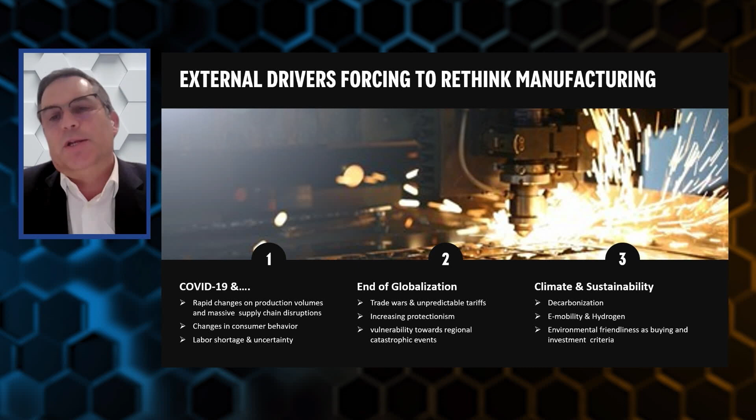And particularly in the last couple of years, we've seen that environmental friendliness is a buying criteria, and it's becoming more of a criteria for investors looking at how companies are performing and what their strategies are towards climate and sustainability. So overall, significant changes which, this goes without saying, have a quite severe impact on manufacturing strategies and what companies need to deal with.

That results clearly in some internal challenges we're hearing about in all our conversations with clients in automotive, general manufacturing, and aerospace - more and more loudly in the last couple of months.

If I start on the left side, the entire topic of complexity - we see an increasing rate of complexity coming purely from new technology and all the challenges that go along with those technology changes in the industry, including an increasing number of variations and variants of products as well as processes.

I talked earlier about e-mobility - from an automotive perspective, all of a sudden you produce the same vehicle as an ICE, as a hybrid, and as a fully battery electric vehicle. That alone has a massive impact on the number of variants you need to handle in a manufacturing environment. Last but not least on complexity, I'd call out the interdependencies between systems, components, and peripheral systems, which are increasingly making our life complex.

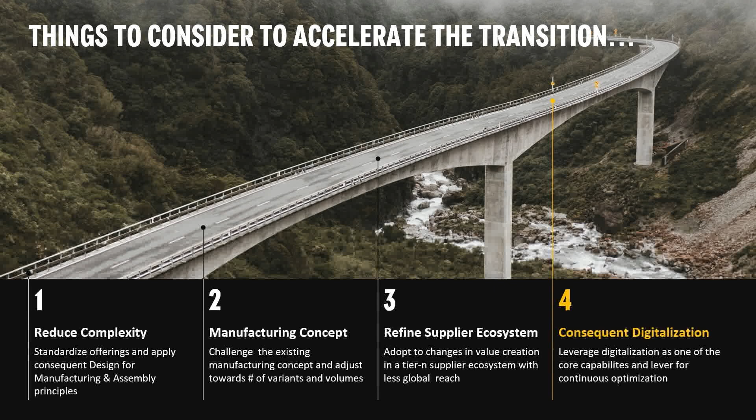Last but not least, there is the theme of consequent digitalization, which will certainly help significantly to accelerate the transformation, meaning learning to leverage those digital technologies and digital tools as one of the core capabilities which allow you to continuously optimize your environment. Again, here the shift from more conventional ways of efficiency increase and optimization activities to doing that much more in the digital space, which allows us to get to new heights, a new wealth of opportunities we haven't actually been able to leverage so far.

So I wanted to leave you with that couple of thoughts. It's certainly a very interesting environment for all of us in the manufacturing space. I think it is a challenging environment which forces us to rethink a lot of qualities of our old thought models and concepts. But on the other hand, it gives us an opportunity in adjusting our manufacturing strategy, adjusting our activities, and getting to the next plateau of productivity, being fit for the future.

With that, Stephen, I want to hand back to you.

Richard, thanks again for spending time with us. That was great for you to talk us through those thoughts. I'm really interested to know, how much of what you've shared today is new from, say, one year ago, versus what you're expecting to be talking to people about perhaps one year from now? It seems like a lot of change happening quite quickly.

Yes, definitely, Stephen. First and foremost, I think that concept of resilient manufacturing is really new to all of us, and I think we're still grasping what it really means in all its different facets and fashions. But we're clearly walking away from volume-optimized, very rigid manufacturing concepts and structures, which weren't really able to deal with all the changes from a volume and complexity perspective. So this is what we painfully had to learn, that that world seems to be a world of the past, and nobody believes that this is coming back.

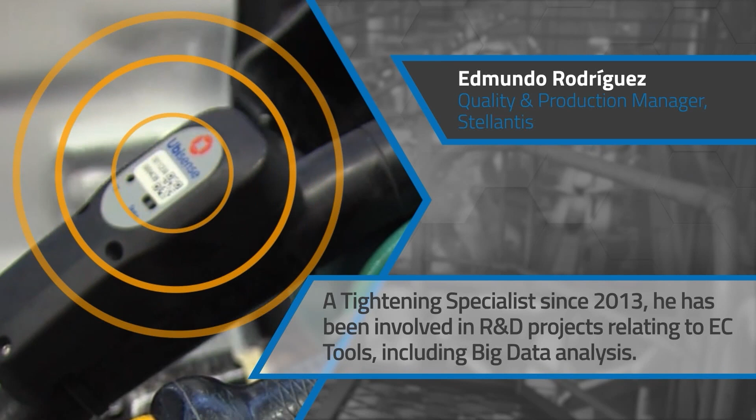With more than 60 years of activity, Vigo is a big and efficient production center with 500,000 vehicles produced a year. This means more than 2,000 cars a day, with particularly high diversity of models and brands.

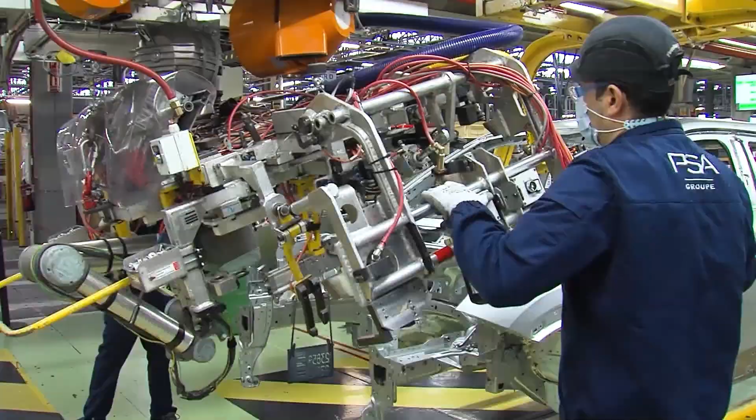Vigo has two assembly lines. The first line, produced since 2008, makes two models of the same vehicle under two brands, the 301 and the Citroen equivalent under the same model. Line 2 produces all the little vans, like Peugeot Partner, Citroen Berlingo, Opel Combo, Vauxhall, and also Toyota Pro Ace and the Citroen Space Tourer, which is a family car. That's a huge amount of brands and models.

This point gets us to have hard work in each of the two assembly lines, needing to ensure the correct operation of every tool when it's located with the correct car.

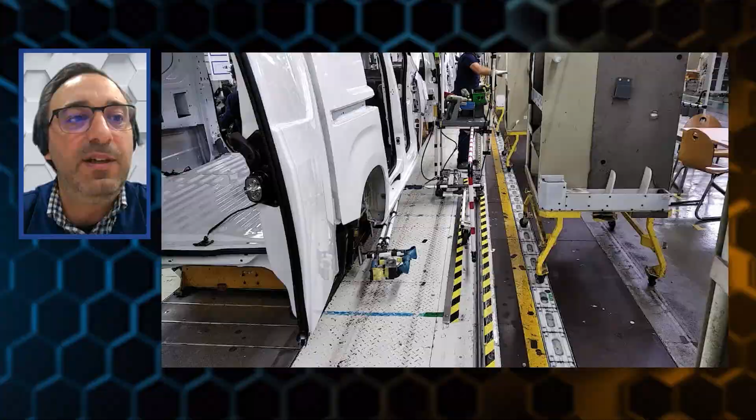In terms of tightening, with more than 500 EC tools working at a time, before the arrival of Ubisense technology we used different solutions with mechanical and digital elements to limit the operation of the tools, using a metallic plate on the floor detected by an inductive sensor, like a chain for a dog that cuts permission for the tool to work. With the photocells on the bars around the chariot, we could detect the car and get an idea of where the tool was. That was the main work for us, to know where the car is and where the tool is also.

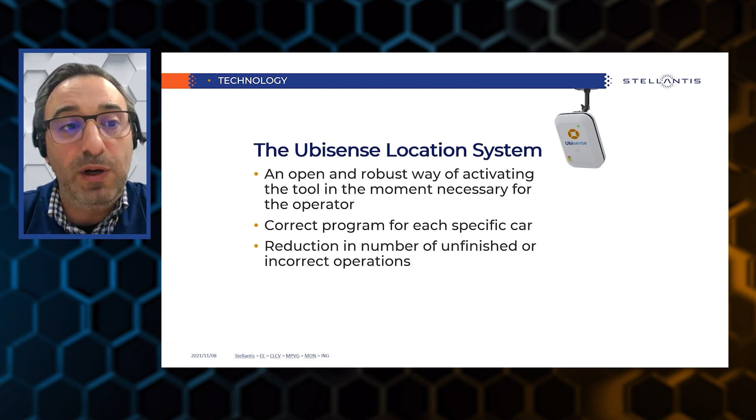But that was inefficient in terms of balancing work, maintenance, and above all quality and production. A lot of non-finished operations were detected by quality systems. With the Ubisense location system, we're able today to get our tools ready just in the moment we need to, with the correct program for the car we need to work on. This meant an important improvement in the time we spent on rework, due to the reduction in the number of non-finished operations. Now I'm going to show you a video taken on the assembly line where I show you how the system works.

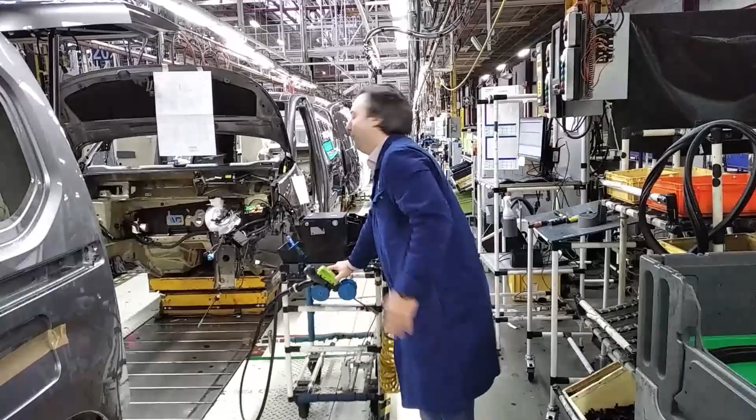That's me on the assembly line. That chariot you see is where it ports the tool. The tool is not ready to work, and there's a white light that shows if the tool is ready. Because the tool is outside the area of the car, it isn't ready. Now it must be ready - you can see the light turning on, and the tool is ready to work with the correct cycle for the correct car. Every car needs a different cycle.

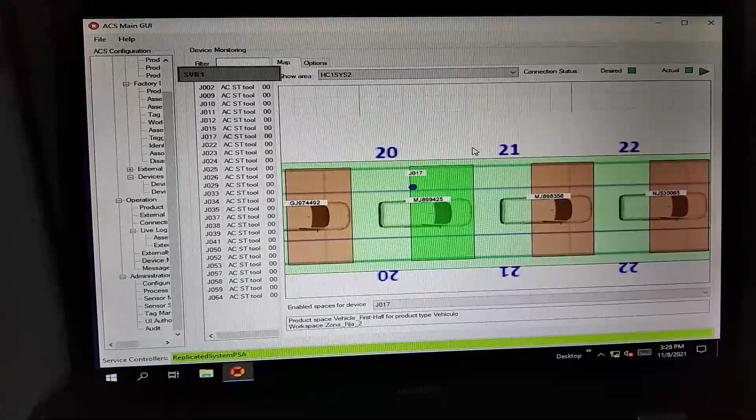If I go out of the area - it's a virtual area that goes with the car - then the tool is off and not ready to work. That's an operation of tightening a security belt. The green cage attached to the tool is the Ubisense tag, and that's what the system sees as I work with the tool and the chariot. The red point turns green when I'm inside the area, as the tool gets inside the area of the car we need to work on, and if it goes out it turns red, meaning the tool has no permission for the operation.

With Ubisense, you can work wherever you want. If you have some delay on your operation, you can stay in the company of the car, and the tool is ready all the time it's near the car.

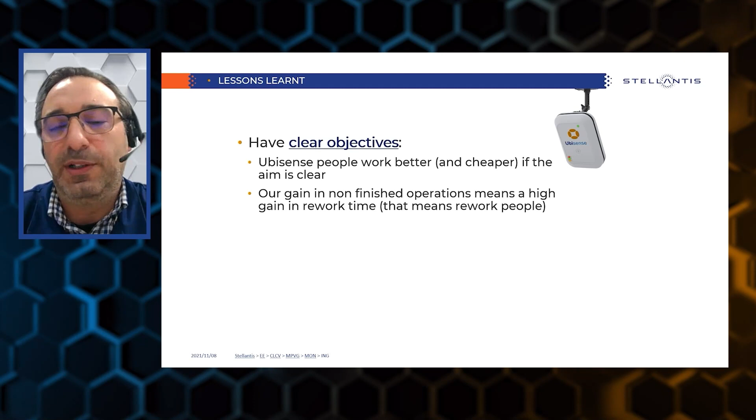About lessons learned: our first lesson is to be sure your objectives are clear when you install this product, because there are a lot of services the product can give, but not all of them are useful for every situation. We were clear on our goal to improve the non-finished operations number, meaning a big improvement in time needed for the product rework.

The second lesson is to be sure that the rest of your systems are profitable, because you can earn some budget taking advantage of every system that already exists. In our case, the information from the encoders we already had gave us the position of the cars, and we saved the cost of installing Ubisense tags in every vehicle.

For our future plans, if everything goes as expected, we're going to extend this type of system to the rest of the areas of the assembly lines, because everybody's very satisfied. The speed of the operations and the operators working in this assembly line is very high. It's a high gain of time for the company, for Stellantis.

Well, that's the end of my presentation, and I'm very pleased to be here. Thank you all.

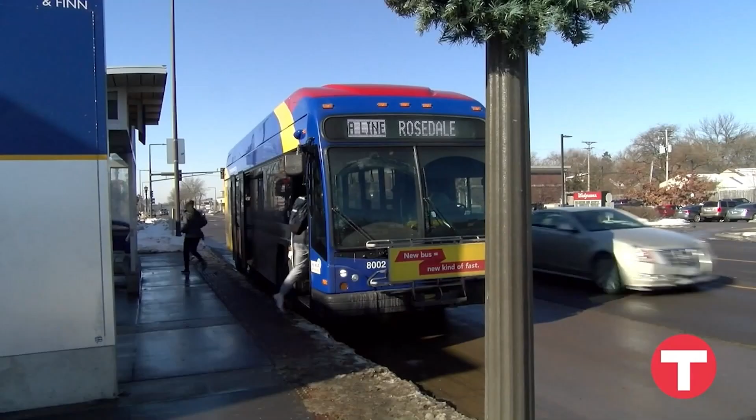Thank you, Steve. I'm Rick Paulson. I work for Metro Transit. I'm a business system analyst here in St. Paul, Minneapolis, Minnesota. And we have a short video to show what Metro Transit's all about.

In 2016, Metro Transit introduced a new type of bus service called Bus Rapid Transit with the opening of the Metro A line on Snelling Avenue. Bus Rapid Transit, also called BRT, is a package of transit enhancements that adds up to a faster trip, more frequent buses, and customer amenities at the stations.

First, let's look at how the service is faster than standard local service. Stations are spaced farther apart so buses make fewer stops, which helps buses stay moving more of the time. Ticket machines at stations and mobile apps allow customers to purchase tickets before boarding. Our buses communicate with traffic lights to allow them to move through intersections faster.

Next, let's look at the amenities that make taking transit more comfortable and convenient: security cameras, emergency phones, enhanced lighting, push-button heating, ticket machines that take cash or a credit card, and signs showing when the next bus will arrive. Learn more at metrotransit.org/BRT.

Excellent. We have a presentation here to show our story with Ubisense. Here's an overview to show the scale of Metro Transit. We have about 81.9 million rides a year, 909 active buses that cover that. That covers about 907 square miles in our 7-county metro area, and we have about 130 routes that cover that.

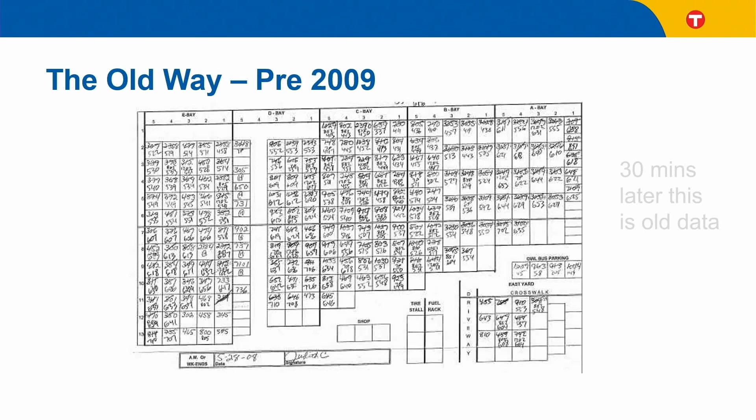Pre-2009, this was our system for marking up and assigning buses. Personnel would walk the garages with this map and fill in bus numbers, probably about 3 times a day: AM, PM, and then evening after pull-in. You can see edits within the map, so they would have to go back and redo it because buses would move. For pullouts, we would have to assign the first row and work our way back, and if anything changed, this would screw up our pullout and things would get clogged up and buses would leave late. This is just a snapshot of the day, so half an hour after, we have old data. There had to be a more efficient method.

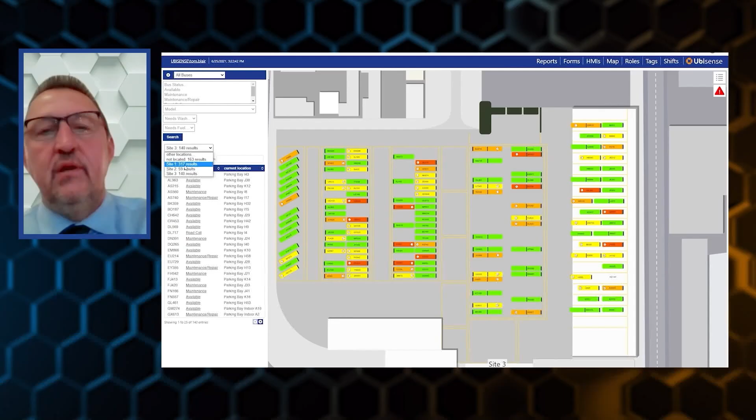So in 2009, Metro Transit issued an RFP. Three companies submitted bids; Ubisense was one of them. This was before my time, because I was a user of the Ubisense system when I was with Trapeze - I would show up in maintenance and go, hey, I need to find a bus, and they would show me this map of where the buses were. I was like, hey cool, you guys have a map. Ubisense was chosen because they could guarantee a more accurate positioning in the garage to keep the buses in the lane in each of the bays. So Ubisense installed their system.

We started with our 5 garages that house our buses. We used battery RFID tags on all the buses and installed sensors in all 5 garages. Then we used GPS location from our CAD AVL system, importing logs from that system into Ubisense to show buses that were parked outside the garage.

The first generation was not an exact replication of the garage - it was a little crude in its representation, but it did show the buses in the lane. It had colored icons showing different statuses: blue was a foreign bus, white was assigned, green was available, and this is what dispatchers used to assign. That was our map through about 2015, and then Transit Yard Manager came about, with a more true representation of the garage. But the downfall was it was a slow loading map and users would complain about that. Still, it gave us more business rules and a cleaner map for the dispatchers to use in maintenance.

Around this time, we added some enhancements and additions to the system. We developed hardwired tags. Our battery tags usually have issues in the winter because winters are a little harsh up here. So the first cold snap in December, we'd probably have 20 tags in each bus garage go dead, and then we'd take time to change those out and track those buses down.

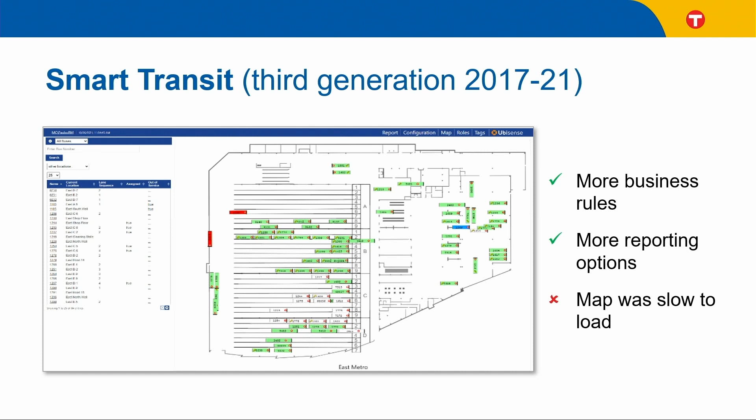With COVID, our service was reduced and a lot of buses were stored, so anyone looking at the map knew that all the buses up there were out of service and not to use. And our present system is SmartSpace.

This one again has more business rules. It's much faster, it's more robust. The look and feel is the same as Smart Transit, so it's not a whole lot of training for users when they move to it.

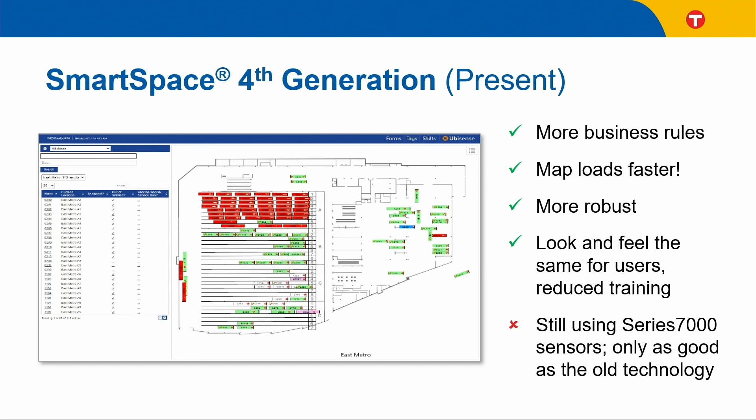And our tags on the buses are usually right up front here. Hardly any issues with them now, with them being hardwired.

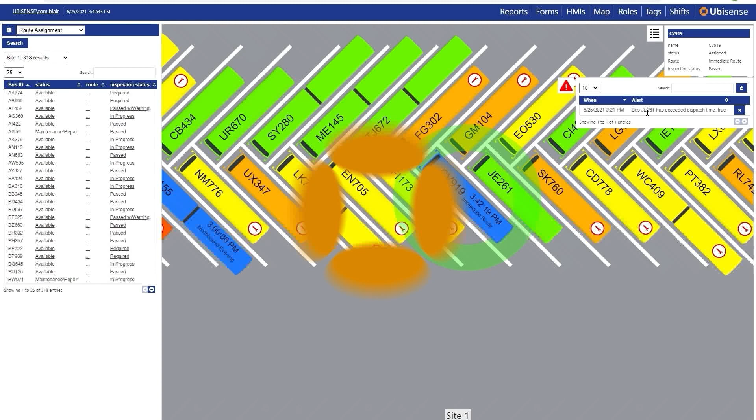New projects we currently have going on: we are currently adding the new sensors to all 7 facilities, and we've started with one garage. We implemented a new Giro HASTUS interface that allows more data to be queried from HASTUS and allows us to show more data on the map, as far as bus status, besides just assigned and unassigned. And we're adding sensors to two more gates on our freeway transit stations.

That's our story. Thank you, and I'd be happy to take any questions.

Rick, thanks, that was great. It's really interesting to see the evolution of what you've been working on, from a very paper-based process through the early versions of hardware and software to where you are now with the latest versions of the technology.

You mentioned you were previously a user of the system. How important do you think that is, to get that user perspective for these types of systems? And has that changed the way you've approached any of these projects?

I think it helped me. I kind of saw the good and the bad when I was a user, heard the complaints, what users would say. But when I took over in 2013, I kind of had an idea of what had to be done. Our battery tags were probably the root cause, and we worked hard to develop a hardwired tag, and we kind of eliminated that issue.

Thinking about the future, we heard from Edmundo at Stellantis about how they're building this real mix of products down there at Vigo, and especially now including electric vehicles. I'm interested to know whether Metro Transit have any plans to electrify the fleet, and if so, what kind of challenges that might pose for you and the team.

Hello everybody, my name is Wolfgang Fuchs. I am working for Mercedes-Benz in the IT operations department, and there I am part of the Center of Competence for all real-time locating systems in the different production and shop floor areas. Today I have the pleasure to give you an overview of where Mercedes-Benz is working together with Ubisense and using their technology, the ultra-wideband technology, for different use cases.

I will start my presentation first with a short insight into our Factory 56, which is quite famous in the meantime. Later on, I will give you an overview of how we are using the ultra-wideband technology at Mercedes-Benz, and which use cases we are preparing and realizing at the moment. I will give you some information about the challenges and lessons we have gained and experienced in the meantime. I think it's approximately up to 10 years which we have experienced with Ubisense at Mercedes-Benz now.

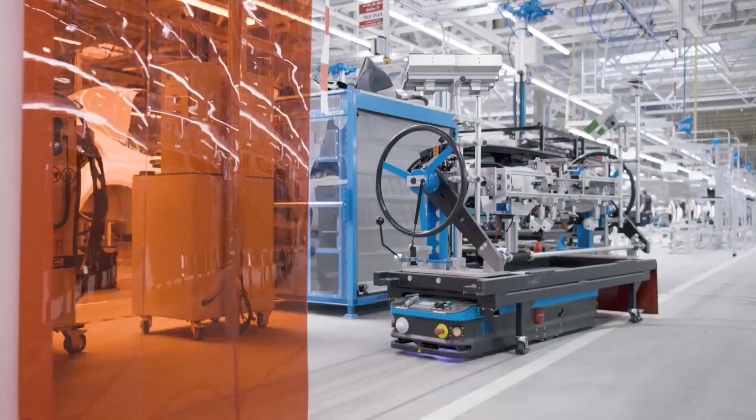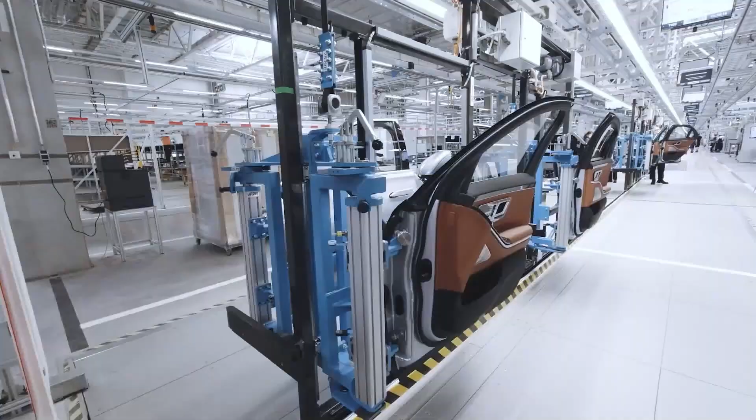Automobile production of the future - what should it look like? It is sustainable, digital, flexible, efficient, and above all it has people as its focus. All this is already reality in Factory 56 at Sindelfingen, Mercedes-Benz's most modern assembly hall in its global production network. Here a diverse range of vehicles is produced fully flexible on the same line, adjusted to market demand - first the S-Class sedan and long wheelbase version, then also the Mercedes-Maybach S-Class and the all-electric EQS. At the same time, efficiency is increasing compared to the previous S-Class assembly by 25%. This has been made possible, among other things, by wide-scale digitalization and by the flexible structure of the production process with tech lines and driverless transport systems. The two tech lines bring together all the complex plant technologies. They serve to avoid fixed points in the assembly process. Flexibility improves - when new models are added, conversion work is easy to carry out in the other areas of the assembly hall.

Now you've had an insight into the new Factory 56, in which we produce most of our most important cars, like the new S-Class, the Maybach, and also the brand new EQS. Factory 56 is interesting for us at this presentation because we use ultra-wideband in every production line, all over the complete shop floor in Factory 56.

But Factory 56 is just one of many halls and facilities where we are working together with Ubisense, using the ultra-wideband locationing system of Ubisense and SmartSpace. For example, alone in Sindelfingen we have at the moment 3 facilities, 3 halls where we use the system. We have Rastatt and Bremen, which are 2 very important other facilities in Germany where we're using Ubisense. We are also working with Ubisense in Charleston, United States at the Vans, and at AMG in Affalterbach, where we produce our high performance engines.

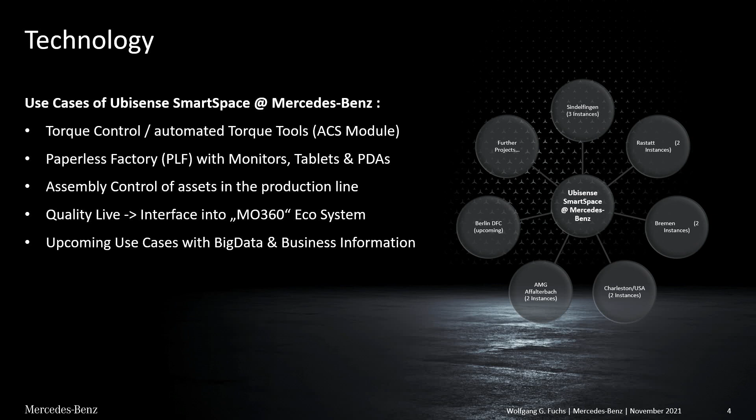Another use case is the assembly control of assets in the production line. That means we are doing two things with this: with the ultra-wideband location, with the real-time locating system, we are giving triggers at the assembly line. For example, when the new car enters into a new station, through the ultra-wideband location, we're giving the system, the device, the automated machine, or the robot the trigger that now we have a new car, and at the same time we're giving the unique identifier.

For example, in Factory 56, it's an 8-digit long number, where each car is individually uniquely identified, and we're giving the number and the trigger, so the machine knows there is a new car inside, and he has the unique identifier and therefore the information, and then he can get the other information he needs from any ERP systems he's connected to and can fulfill and do his job. We have many different assets and devices there, like refilling, refueling, measuring devices, and so on, a lot of them.

Ubisense SmartSpace real-time locating information is part of the Quality Live application, which is part of our MO360 ecosystem platform, which I will give you an insight into in some minutes, and therefore also a very important system where real-time locating system information is going into the facility, into the production, to give the workers information about real-time location of different cars, bodies, and so on, where the workers have different jobs to do.

And we have, I'd say, many upcoming use cases and ideas where we could use the system. I just said the large words like big data, artificial intelligence, business information, getting more digitalized. These are the different technologies and use cases we use at Mercedes-Benz at the moment.

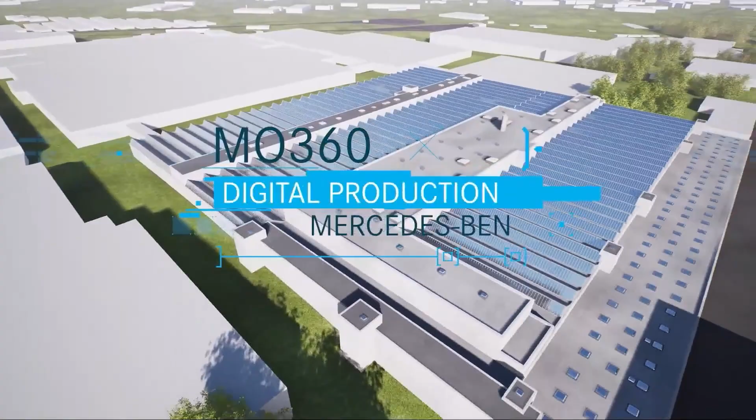Digitalization opens up entirely new possibilities for the future of vehicle production at Mercedes-Benz. It is the fully digitized and paperless production that connects all production data for the first time, making it available across the entire production process in real time, while simultaneously ensuring the highest product quality. All this is enabled by MO360, the new digital ecosystem for vehicle production.

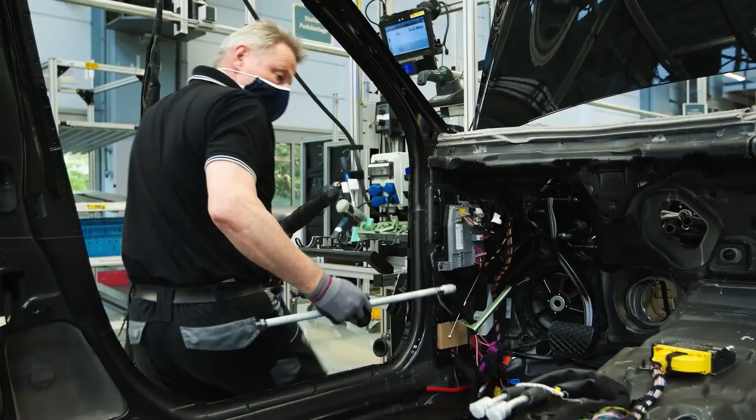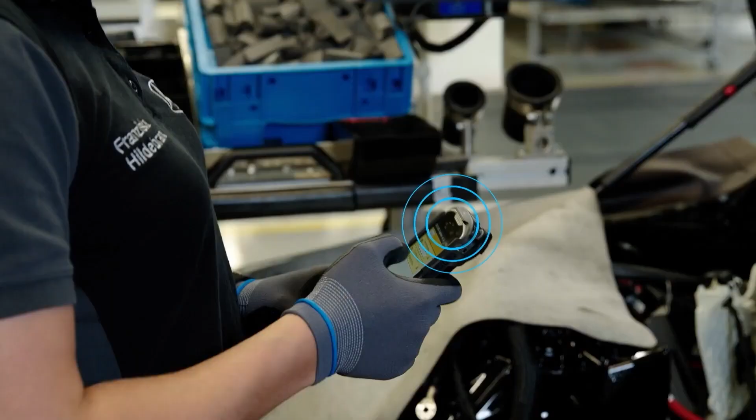In our ultra-modern production, vehicles are located within the production line with absolute precision. This is the basis for the needs-based information management of the paperless factory, so each worker receives exactly the information he needs for his next work step directly at his workplace. Internet of Things tools are integrated into the factory's local network, performing checks on whether all work steps have been fully and correctly completed. Workers confirm their activities digitally as well, ensuring greater efficiency and higher quality.

The quality management system is fully integrated in MO360. This means that every quality manager has full access to the current live status of every single vehicle in production at any time.

MO360 detects deviations and informs only the responsible employees and quality managers. With the previously collected production data, the cause of a deviation is identified straight away and corrected instantly.

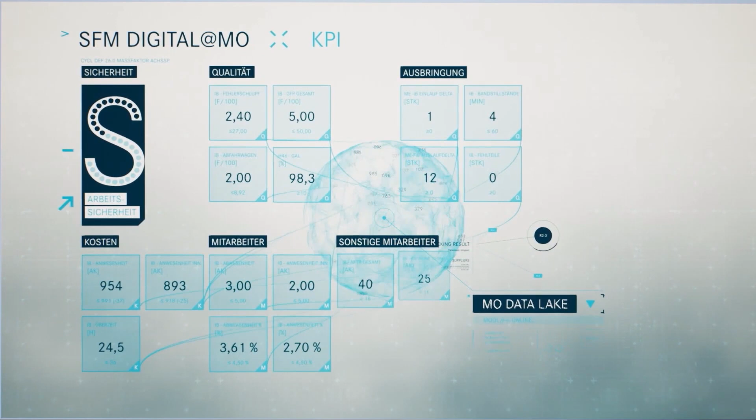All applications of the digital ecosystem MO360 are fully integrated and interact seamlessly. The core of the system is the digital shop floor management application, in which all production data is merged, allowing access to a comprehensive live status of the production at any time.

In everyday use, the digital shop floor management is completely convincing, both in the optimization of quality processes and as a communication tool. MO360, the new digital ecosystem for the vehicle production by Mercedes-Benz.

Digitalization, that's the slogan for the future. So what are our plans for the future in regard to Ubisense at Mercedes-Benz? First of all, as I told before, the cloud solution, the cloud installation will be the thing we will try out very soon, because we're very interested and keen in getting more involved with cloud solutions and get rid of our own unique data centers which we have at each facility. So we want to have the efficiencies and the positive aspects of the cloud possibilities, and that is one major aspect we will follow in the future, and we will be starting with it very soon.

We will go on with the next two steps with provision of new and additional APIs, because that brings you forward. With time and with many experiences, you gain more information and more ideas how you could use the information and the real-time data. So it is important for us because it brings you forward to do a provision of new and additional APIs to get more and more systems connected with your real-time locating data.

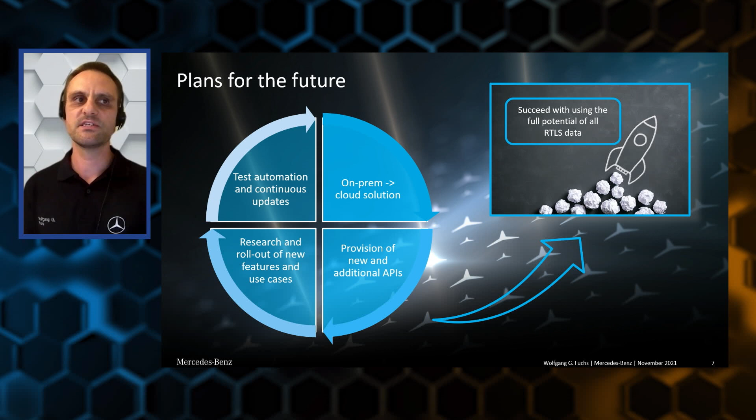And we think if we get all that information, those ideas, those use cases together, we will really succeed in using the full potential of our real-time locating system data with Ubisense. And yeah, that was my presentation. Thank you for your attention, and perhaps I can answer some of your questions.

Wolfgang, thanks very much for that. It's great that you've packed more than 10 years of experience into the lessons you've learned and your plans for the future. So thanks for sharing that.

One of the things I was particularly interested in, you mentioned right at the start around your role and what you're doing at Mercedes, is this idea of a centre of excellence, a centralised team responsible for these location-based technologies. How did that come about, and is that something you would suggest other organisations should look at and benefit from?

Yeah. First of all, of course it is hard to fit 10 years of experience into a 10-minute video like this, but I try to. And to your question, yes, I am part of the Center of Competence, Center of Excellence. It's quite the same, you can call it what you want. Some call it Center of Excellence, some Center of Competence. I think the more diverse your company is, the larger your company is, the more important such an institution becomes.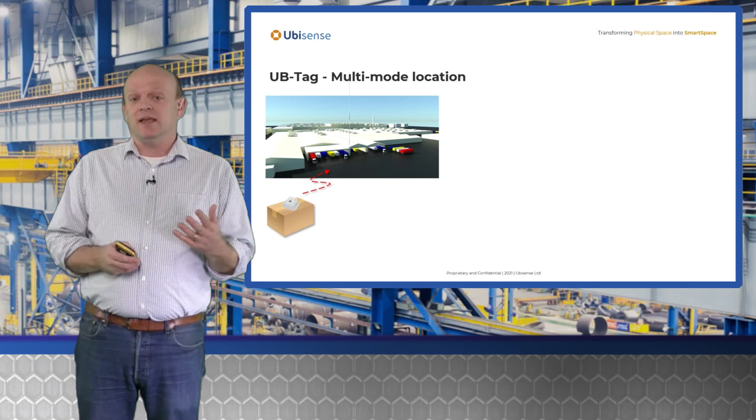Now, you might think that if it does all of these things, and it can actually do all of them simultaneously, that means it's a more flexible tag, and you'd be right. So we can take a package that comes into a factory, attach one of these tags to it, and take that into, say, a loading bay. There, we may only want to know roughly where that item is, so we can use Bluetooth Low Energy beacon sensing using a plug-in sensor like that.

They're very, very cheap, to find out where that particular parcel is to within perhaps 5 or 10 meters accuracy. And then as that package moves through the facility, maybe it moves into a warehouse where we need slightly better accuracy, perhaps a meter or 2, and there we can use exactly the same tag, transmitting Quuppa signals, using the Quuppa location system to find out which particular area of the warehouse it's in.

We can also use the same tag whilst the package is moved to line side, where there's lots of metal, a very challenging environment, and we need to know exactly where that particular item is, with the Ubisense system using our ultra-wideband technology to find very precisely where that tag is. So the same tag can be used all the way through the life cycle of a package, moving around the facility using different location modalities to get the right balance of performance and cost.

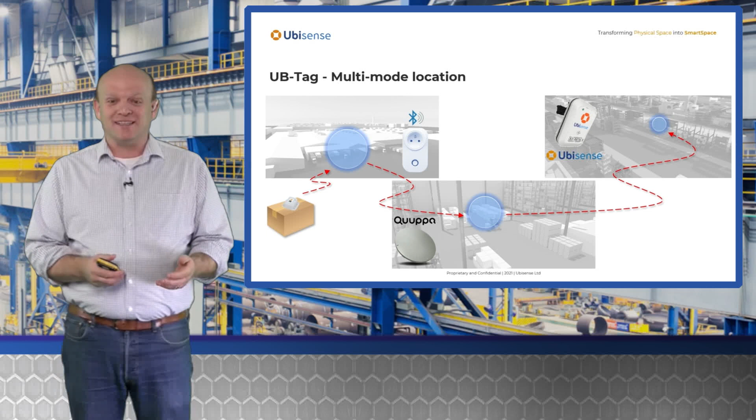We're doing all of these things simultaneously, and you might think that means the battery lifetime of the tag would be compromised. Not at all. The UB tag is actually our longest lifetime tag for a particular size of battery, more than 6 times the battery lifetime of competing UWB tags using similar batteries. If we look at the battery lifetime of a tag transmitting ultra-wideband once a second continuously, with no cheating using accelerometers to detect motion, then a UB tag will last for over 10 years in that mode.

A competitive ultra-wideband tag might only last 1.6 years, so there's a big difference in battery lifetime. If we look at the UB tag in BLE mode, it's over 13 years. And actually, we can do both of those things together, ultra-wideband and BLE, and still get nearly 8 years of battery lifetime out of a tag. So it's a very, very long-lived tag device.

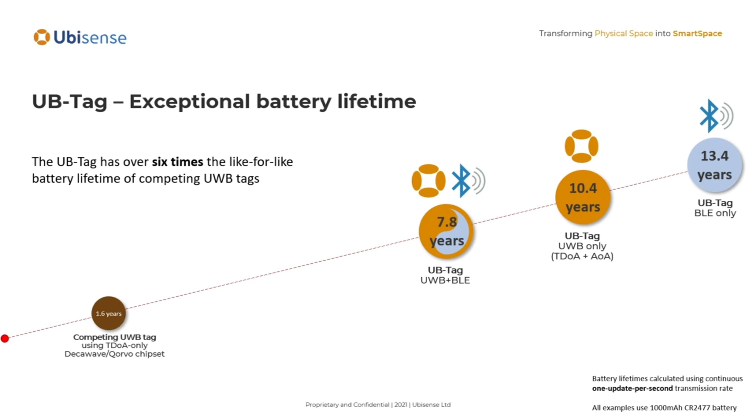Now, because we're expecting these tags to be out in the environment for many, many years, we have to build them tough, and we've built the UB tag for industry. It's very compact - the main body of the tag is about the size of the top of your thumb. It can attach to anything and it's not obtrusive. It's tough, a sealed unit, tested to IP69K. Nothing can get in.

It will last for a very long time. We've driven cars over it. It has multiple BLE antennas, so it allows those technologies using BLE to work more effectively in tough industrial environments. And it has a magnetic button that allows us to interact with the tag by holding a magnet close to it, without having to put any kind of break in the case, which might let in water or similar problems. It can be attached to items in lots of different ways - we can use tie wraps, screws, or glue it to things. It even comes in different form factors where we don't have the mounting lugs, just the main body, and as a watch type form factor that allows it to be used for tracking personnel.

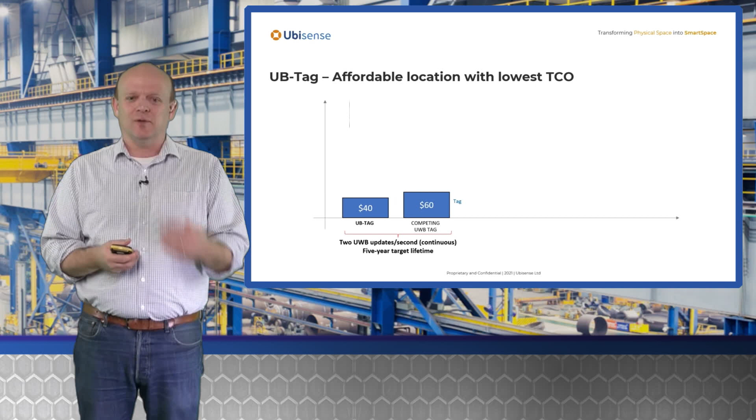It's also the lowest total cost of ownership tag that we can see out there. If we look at an ultra-wideband application where we're using a tag for about 5 years, tracking it twice a second continuously, which might be the kind of performance we're looking for in a factory, the UB tag is cheaper than competitive ultra-wideband tags right from the get-go. But because we've got such a long battery lifetime, we also win in terms of total cost of ownership. For that 5-year battery lifetime, the UB tag has enough battery life to get us through to the end with the battery it had on day one. But that competitive tag needs its battery replacing roughly every year, so every year we have to pay for a new battery, plus the cost of going to find that tag, bringing it back, changing the battery and putting it out there again. We've talked to our customers, and that cost can be anywhere from $10 to $80 each time a battery change or recharge cycle is taken into account. Here I've assumed it's at the low end of that scale. But by the time we've done that 5 times, the total cost of ownership of that tag over the 5-year period is more than 3 times the total cost of ownership of the UB tag.

We can do a similar calculation in the BLE space. Although the UB tag is more expensive than competing BLE tags - which are extremely cheap, made in very high volumes, but have very small batteries - the UB tag probably lasts about 3 times as long as one of those other tags. Again, by the time you've considered taking that tag, bringing it back, and changing it for another one - these BLE tags tend to have sealed batteries - by the time you've done that a few times, the total cost of ownership of the UB tag is about half that of the competitive BLE technology. So not only is it our most capable tag, it's also the lowest cost of ownership tag.

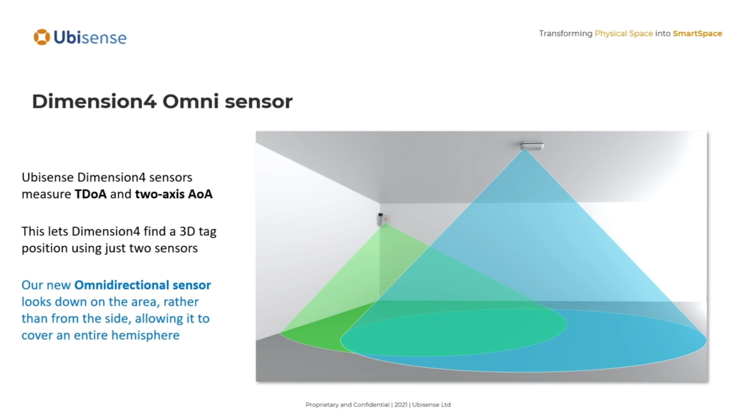So I'm going to hand over now to my colleague John Heathcote, who's going to show you some of these new technologies in action.

Thanks for that introduction, Andy. So let's now take a look at how we can put some of those technologies into action and solve some real customer problems with Ubisense's SmartSpace platform.

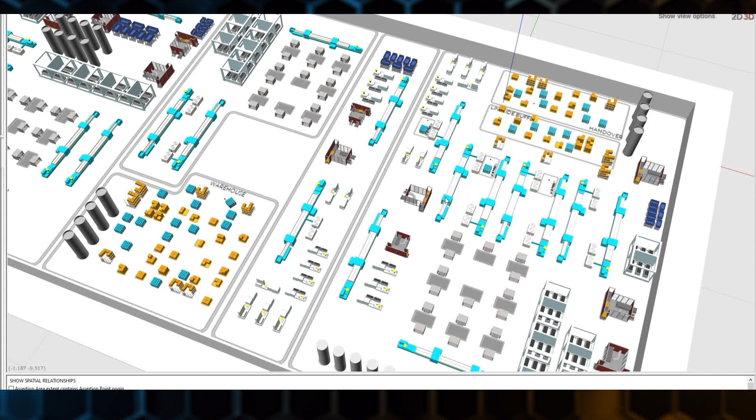This is a really common problem, and many customers we engage with are looking to move away from traditional manual bookings into their ERP system using things like barcode scanners, because being manual, those processes can be both error-prone and time-consuming.

So what we have in SmartSpace is this ability to geometrically model the production environment and also build a spatial model that represents all the interesting areas, in this case, of the material flow process. As material flows from the warehouse to various downstream storage locations, and eventually to what we see over here, these line-side consumption points, we have smaller and smaller footprints for material to be located in, and therefore more stringent requirements to register material arrival in each of those locations. This implies an increasing level of location accuracy requirement for materials arriving at each of these locations.

This is therefore a great example of what can be achieved with a multimodal tracking system using the UB tag that Andy's introduced and Ubisense Omni sensors.

In this area here, where we've got fairly small zone requirements, we can achieve wide area coverage across these line feed locations and nearby storage buffers with Ubisense Omni sensors. They allow us to track this material with pinpoint accuracy to guarantee the correct association between those materials and the various control points in the material flow process.

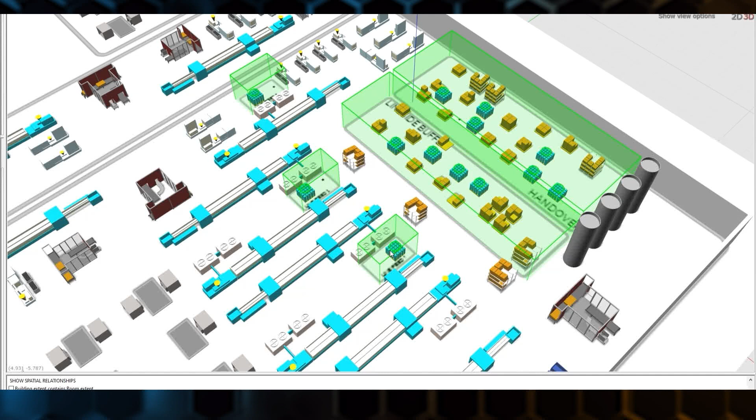You can actually see an example right here. If I get this pallet over here to move into one of these line feed locations, you can see that this pallet is now being tracked to around 15 centimeters accuracy, and we get a highly reliable spatial trigger as that material arrives into this tightly defined line feed location.

If we now zoom out and shift over to the warehouse as another example, what we can see here is pallets stored in a fairly large area, and the spatial zone that represents the warehouse is much bigger.

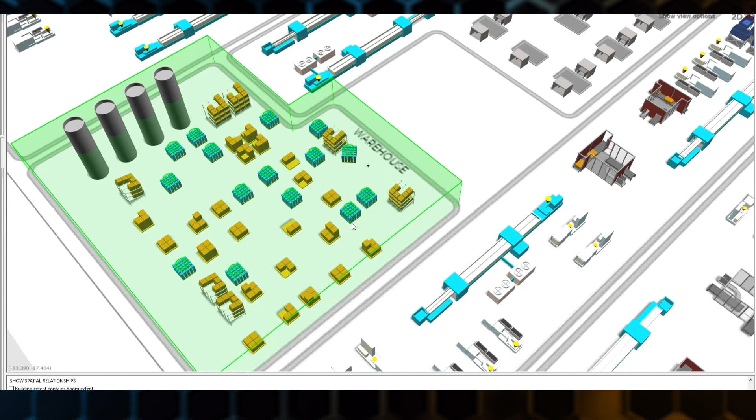By way of comparison, we can see that the required location accuracy to confirm materials inside the warehouse is much lower. In fact, what we can see here is a pallet that's being tracked also with the UbiTag, but in this case we're using a lower cost, angle-of-arrival based Bluetooth low energy real-time location system with a typical accuracy of about 1.5 meters. That would be perfectly acceptable for confirming and asserting that materials are located in this warehouse, and also for finding those materials if needed using a map.

So in doing so, we're able to use the best of multimodal sensing capabilities to achieve reliable location data everywhere in the material flow process.

So let's now switch over to see how that material flow information can manifest itself inside SmartSpace and be consumed by business users on the shop floor.

Here you can see a simple overview dashboard built using SmartSpace of all our material status information. We can see exactly where we have material shortages. In this case, we can see our line feed locations are all lacking material availability.

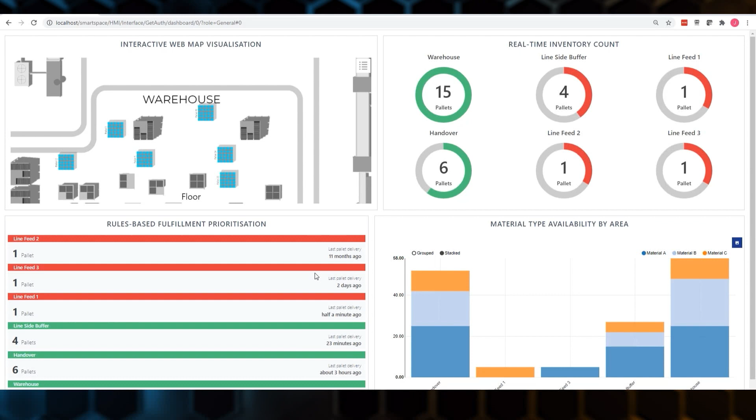We can also, using SmartSpace's process logic capabilities, build prioritization capabilities that tell the fulfillment team where materials are required most urgently. We can see in real time where all of our pallets and materials are located, and we can see those movements happening in real time on the map.

Let's say I wanted to request that one of these pallets moves down to line feed number 2. I can immediately move that pallet to line feed 2. We'll see in real time as that pallet arrives, our line feed 2 material increments and the amount of material at various locations changes as well. And the priorities for our fulfillment have changed because line feed 2 is no longer lacking materials.

Now we can head back to Andy to get some more exciting product updates.

Now I'd like to talk a little bit about how we go about deploying our systems. The stages in which we deploy are typically split into 4 components.

First of all, we'll go and survey a particular site that a customer has invited us to take a look at. That's really about understanding the site environment and the application that the customer wants us to implement.

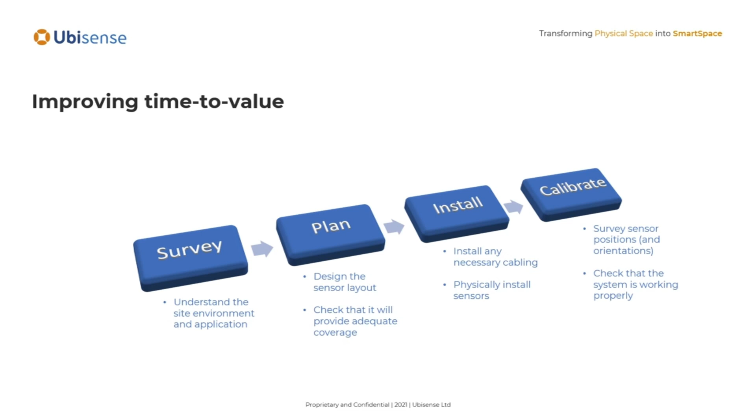If we look at the environment capture area, the survey, the way this used to be done is that people would come to us with a floor plan for a facility, and we'd try to work out from that where we might place sensors, where in those areas the sensors could see, and so on. The problem was that no floor plan in existence for any building is exactly right, and it doesn't really tell you much about how the building's being used.

So we get rid of that, and nowadays we use laser scanner technology. This is one of our employees carrying a laser scanner in his hand. It's got a backpack-mounted data capture utility, and that generates a point cloud, a bit like this one, which shows a kind of indoor 3D picture of exactly where everything is in a factory so that we can understand how the factory is set up.

Now, the point cloud by itself isn't tremendously useful, but we have tools that turn that point cloud into a 3D model with walls and equipment and so on. We can use that model in lots of ways to improve the subsequent stages of our installation.

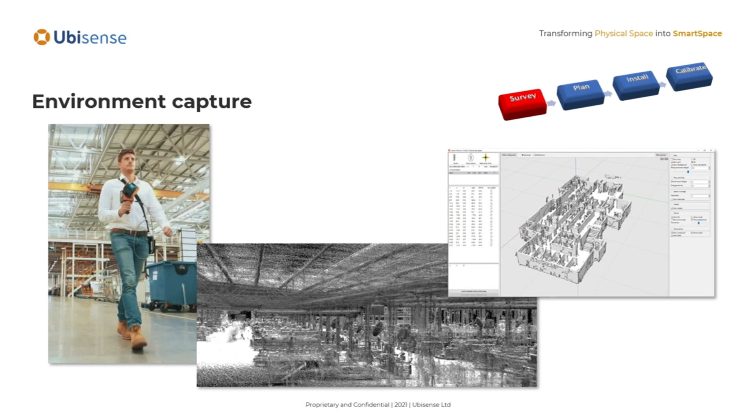We can take that model, for example, and in the next stage, planning the sensor system, work out where the optimal place is and the optimal number of sensors are going to be. We can take the model and place virtual sensors inside it and see exactly how they're going to be obstructed by items in the factory, walls, equipment, and so on, and add and remove sensors until we've got exactly the right balance of performance and cost for the particular customer.

Once we've got an optimal sensor plan, we can work out whether the performance of the sensor system is really going to match the application requirements. We can send virtual tags into the space and use exactly the same algorithms that we'll use in the final sensor system to analyze virtual signals sent from those virtual tags to our virtual sensors, and check to see what the performance of the system is at any point in that space.

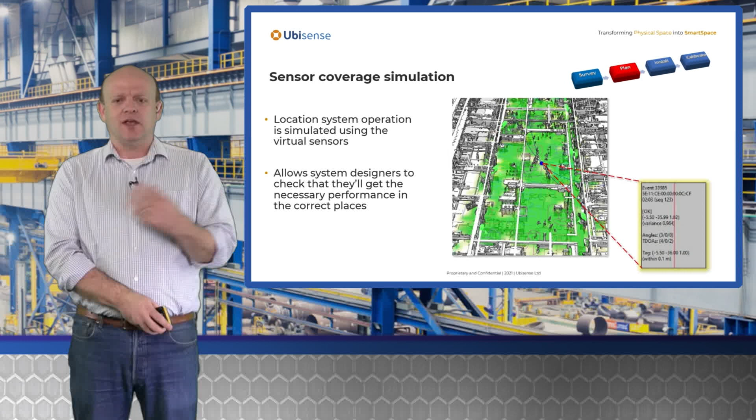So here, for example, if you look at the bottom right, you can see that the tag is predicted to be accurate to at most 0.1 meters at that particular point in space. So it's pretty good there, and we're pretty sure that the sensor system is going to work well in that particular place.

Now, at that point, we know where the sensors are going to be, and so we can go and pull the cables to those points and install sensors at those places. At that point, we need to do our calibration.

The traditional way of doing that was using what's called a laser total station. This is a piece of surveying equipment, and it allows us to find exactly where those sensors are in a facility to within a couple of centimeters accuracy. We need to do that because if we want to get centimeter level ultra-wideband positioning at the end of the day, then we need to know where our sensors are to a similar level of accuracy.

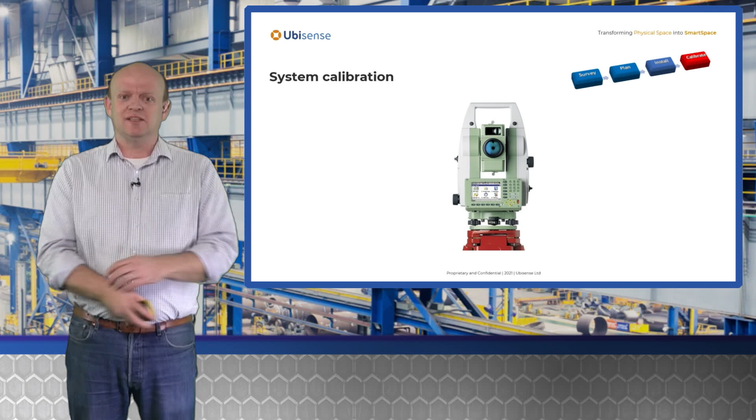The problem with these things is that they're quite cumbersome and time-consuming to use. So again, we can get rid of that and go back to our laser scanning technology that we described earlier.

We use this LiDAR scanner, but this time we place a Ubisense tag on it. You can see it just above the orange curved top of the laser scanner there. What we do then is take a map, we walk around the facility again, and that gives us a trace of exactly where the laser scanner has passed. At the same time, we're measuring signals from the Ubisense system, and we marry those two pieces of information up. The laser scanner lets us work out exactly where the sensors are, exactly what orientation they're in, and it automatically self-calibrates the system. This patent-pending technology allows us to calibrate even the most complex location systems in the time it takes to walk around the facility.

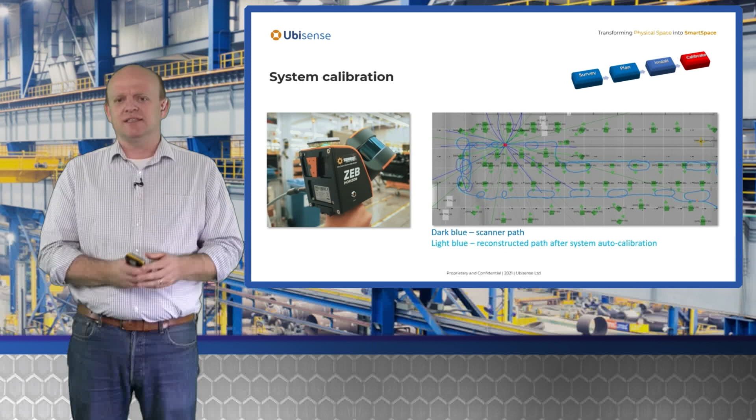This here is an example of a calibration that we did at a car assembly line. It's actually got two traces on there, although it's very hard to see the difference between them. The dark blue trace is the path that the scanner walks around the facility, and the light blue trace is the results that we got from the Ubisense system after it has automatically calibrated itself from that scanner run. The fact that you can't really see those two traces as distinct means that the accuracy of the system is incredibly high. In fact, the accuracy of auto-calibration is higher than the manual approach we used to use.

So we've actually been using this over the last couple of months in some of the biggest deployments we've been doing over that time, and it's really proving benefits.

For example, we've done a large car assembly plant using this technology in the US. And that's important because car plants run pretty much 24/7. You get very, very small breaks in which you can install and calibrate a system. So time to value there is all dependent on being able to get in, install the system, calibrate it, and get out.

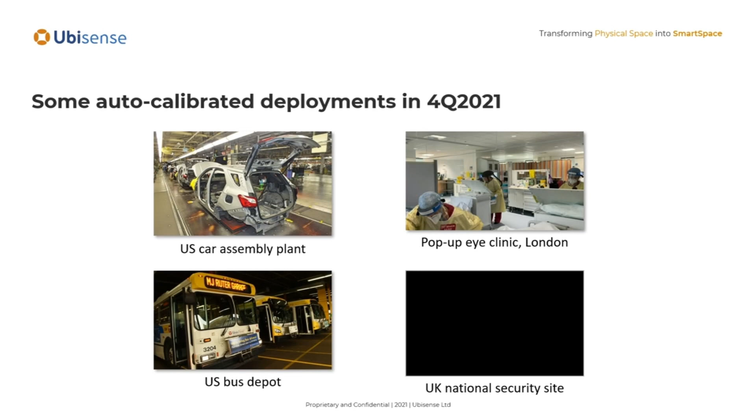Similarly, we did a large US bus depot, and the trick there is being able to do that whilst buses are driving around at high speed through the depot doing their normal runs and so on. The ability to do this in just a couple of hours across this huge bus depot really was beneficial for our team in the US and for the customer as well.

We've also been using it in the UK. We've installed a pop-up eye clinic at a shopping centre in London using this technology. Again, time to value is important for these guys because, of course, it's a pop-up clinic. It's meant to be quick and easy to install the system to support what's a potentially temporary installation that has to be installed very, very quickly.

And we did the same thing at a national security site in the UK as well. Here, the challenge really was that the people running that site don't want us on site. They don't really want anything to slow down their operations or for anybody to really be interacting with that site at all. So the auto calibration allowed us to get in, do the calibration, and get out as quickly as we possibly could. And of course, the customer is very happy about that.

So John is going to show you a few more examples of these tools in action so you can see exactly how they work yourself.

Thanks, Andy. So what I'm going to show you now is a brief introduction to our new Dimension 4 Sensor Planner tool, which is going to make system planning fundamentally easier and more reliable for anyone who's working with the Dimension 4 system.

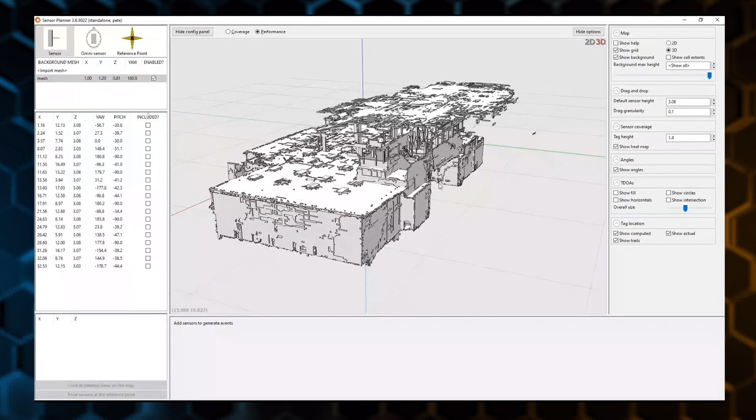Now, in order to use the auto-generated model you can see here to perform sensor planning, what we need to do is focus in on the area that we want to do our sensor planning design around. So what we can do with this model is take, in this case, all the high elevation and roof details off, so we can see inside the building where we want to create our sensor plan.

So now we've got a full site model where we can create a sensor plan and analyze sensor system performance in any of the required tracking areas for the customer. Let's take a look at what it means to actually build a sensor plan and look at sensor system performance, starting with this little room area over here.

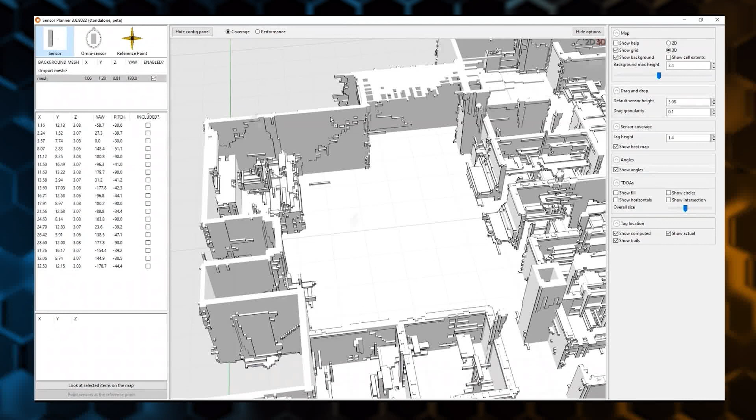All we need to do with the sensor planner is decide what type of sensor we want to deploy and drag it into the environment. If I come up to the top left where we've got sensor, and drag one down into the environment, the system is smart enough, if I drop it near this wall, to know that I'm wanting to snap that sensor to that surface, which represents a wall structural surface in the environment.

Now if we want to reorient that sensor to point into a different part of the environment, we literally just shift-click into the model, and that makes the sensor point at where our mouse is located.

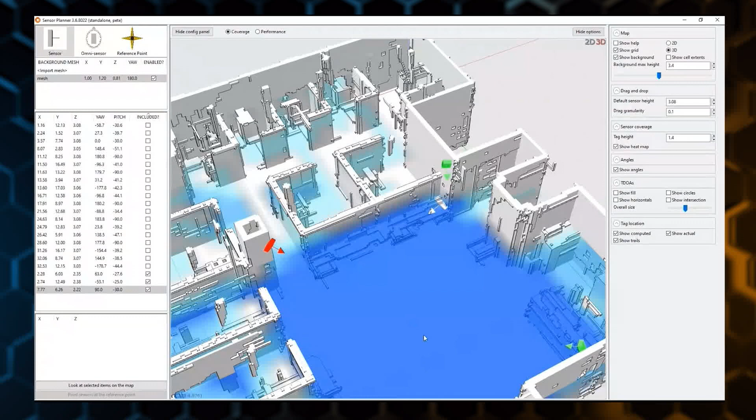Let's go ahead and start dragging a couple more sensors into the environment so we can see what a more general coverage area looks like with the sensor planner tool. So a couple more onto this corner here, and one last one in our final corner.

So what we end up with once we've done that is this blue colored, almost like a heat map, that is spread out across the building space. The blue color and the depth of the blue color gives us an indication of the amount of tracking coverage and confidence in the tracking that we'll get in each of those areas.

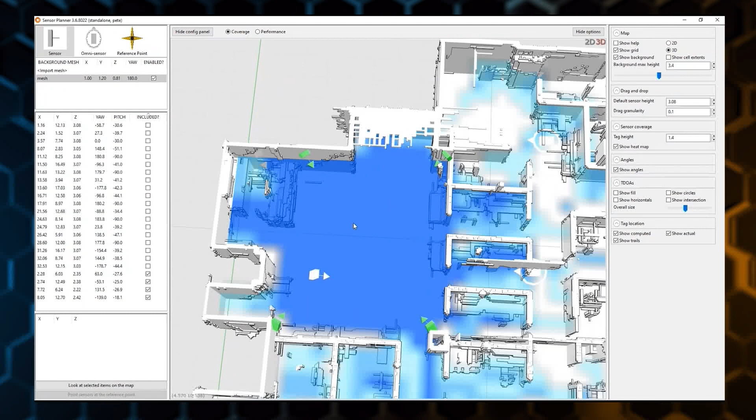A darker or deeper blue color represents a high degree of confidence and reliability in our tracking. As the color fades off into lighter blue and eventually white, that is a decreasing level of coverage, and white basically means we've got no sensor coverage in that area.

Now, the coverage map that we have is planar, so we can come over here and actually adjust the height of the coverage map. Then the system recomputes the coverage, taking those new structural characteristics of the model into account, and you can see the amount of blue in our coverage map has reduced.

So you can see, for example, over here where we are behind a desk, the sensor system at that height wouldn't be able to see behind the desk through the structure of the occluding desk. So the model takes all of those structural complexities into account when we're working out this coverage map.

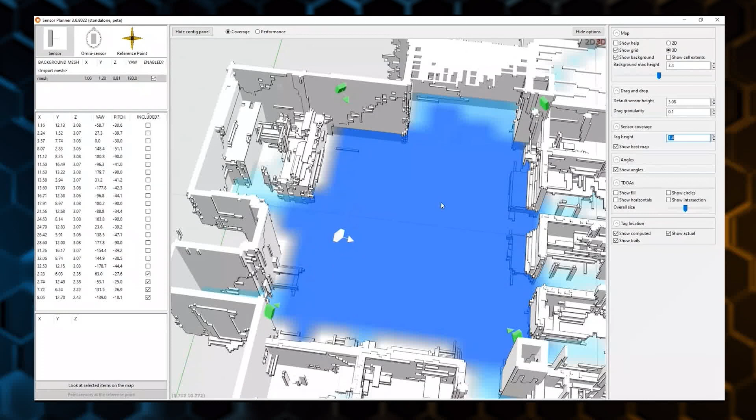The last thing I want to quickly show you is we switch now to a site-wide view, and I bring in a model that I prepared earlier where I've deployed sensors all over the environment, to give you an idea of what a full coverage map looks like.

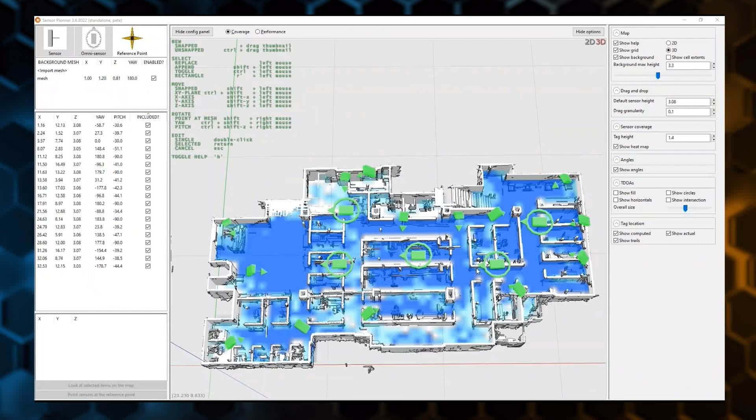The system is now computing all that coverage heat map, and as that starts to get filled in, you can see across an entire facility - and this could be as big a facility as you like - this bird's eye view of the quality of your coverage for all the sensors that you have placed into the environment. So that's all from me, and back over to you, Andy.

Thanks, John. Whilst we were watching John's demonstration, a question came in which asked whether we could periodically do that same calibration task in a factory after the system's been installed and has been running for some time. And the answer is absolutely yes, we can.

That's a really good idea as part of a periodic maintenance check, to confirm that the calibration of the system is still as good as it was on day one, because as we all know, factories are dynamic places - things get bumped all the time. It's really important to make sure that those checks happen. Now, we've got lots of health monitoring, as Wolfgang from Daimler mentioned earlier, that tells us about what's happening in a factory, but that kind of periodic health check is not a bad thing to be doing with any large-scale location system.

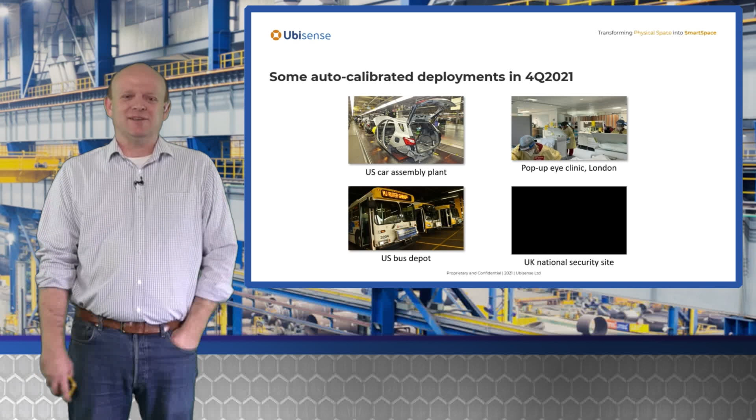So the last thing I'd like to talk about is outdoor centimetre level positioning. Obviously indoors with technologies like ultra-wideband, we can track extremely precisely.

We've done an awful lot of work outdoors with technologies like GPS. Everybody understands how GPS works these days: we have a mobile device, some satellites, and we measure signals from those satellites at the mobile device to find out where it is.

In principle, that's extremely accurate. But in practice, the accuracy of standard GPS is maybe in the 5 to 10 meter range, due to signal errors introduced by passage through the ionosphere of the Earth. That limits the applications we can use GPS technology for outdoors. It's a great technology, very low infrastructure, but not accurate enough for some of the things we're doing. So we've been interested in how we can do centimetre level positioning outdoors.

A new technology called RTK GPS is something we think is very interesting. The way RTK GPS works is it layers a whole bunch of technologies on top of each other to get fantastic outdoor accuracy.

The first thing it does is use what are called carrier phase techniques, where it looks very carefully at the incoming signals from GPS satellites to essentially count how many wavelengths of signal there are between the mobile device and the satellites. That gives us some extra information about where the mobile device is.

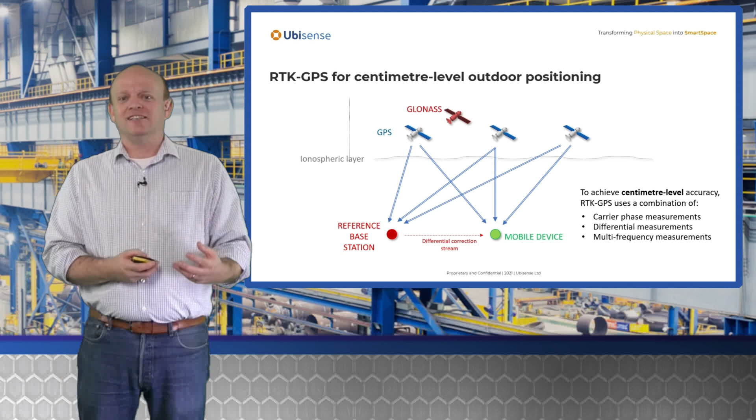And then finally, there are lots of different kinds of global navigation satellite systems out there now. There's the GLONASS system, which is Russian. There's the Galileo system, which is European. And there's the Beidou system, which is Chinese. All of these systems transmit signals that we can receive at both our base station and our mobile device to figure out exactly where that mobile device is.

The difference is, rather than measuring say 8 signals at our mobile device, now we're measuring about 60. That increase in the number of signals, the amount of information we've got, and the ability to use differential techniques means we can get incredibly accurate positioning.

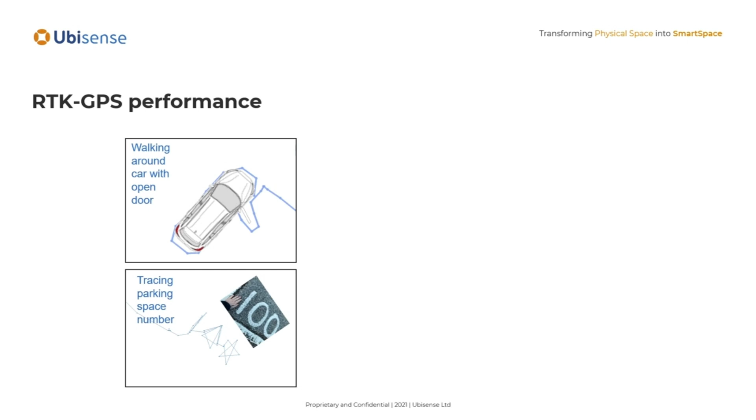You might say, why has it got a star at the bottom rather than a 0? The reason is because we're only getting 1 update per second, and I was moving the tag around that 0 too fast. But all of the points on that star are on the 0. I can really guarantee that it's accurate to about 1 centimetre.

So we're taking that technology and combining it with ultra-wideband to allow seamless indoor and outdoor tracking. Indoors, that tag will use traditional ultra-wideband technology from Ubisense, accurate to a few centimetres. Outdoors, it will use RTK GPS techniques to figure out where it is, and then send that information back to the Ubisense SmartSpace software, either over a local area, a wide area, or a cellular network.

Now, there's got to be a downside to this. The downside is simply power. GPS is quite a power-hungry technology, so when we're using RTK GPS, we have to be powered by a piece of host equipment. This isn't something we'd place on large numbers of pallets or stored items. Rather, we'd be tracking things like the forklift used to move those items, or perhaps cranes, or people using smartphones.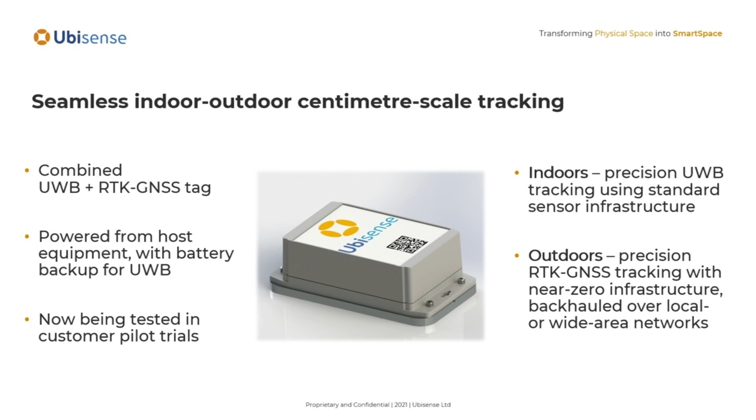This technology is already being used by Ubisense in customer trials, and it's going very well. We see lots of applications for this in the future—for example, forklifts tracking items that are placed indoors and then taken outdoors and stored in storage yards. That's a perfect example for using RTK GPS. We have a power source, and we can even work out the orientation of the forklift by putting two of these units on and seeing how they move relative to each other.

The same kind of technology can be used in these enormous yards. This is an example of a wind turbine factory in the US, and the same technology allows us to get centimetre level positioning of all these items, and also their orientation, if we track multiple points on them using multiple pickup units or forklifts across an entire space, using just one or two base stations. So it's very, very low in terms of infrastructure cost.

We can use the same technology for safety-of-life applications, like making sure people don't wander during rail maintenance onto live rails. Here, accuracy really is important—you've got to be able to tell between this rail, which is live, and the one next to it, which is not—and this technology allows you to do that.

So at this point, I'm going to hand over to Jon, who's going to describe another use for this mixed indoor and outdoor centimetre level precision.

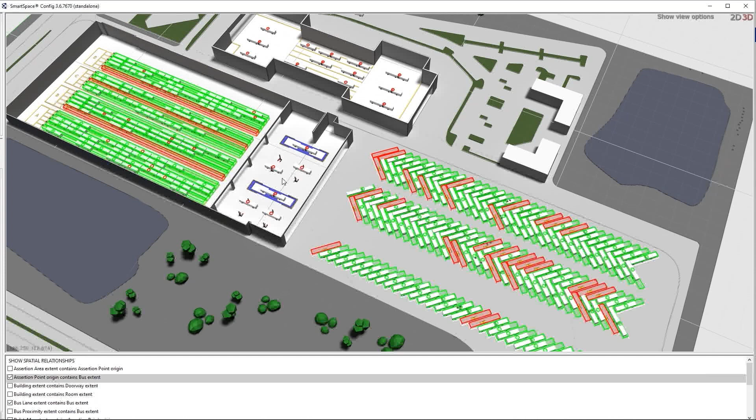We can also see with a high degree of confidence which bays in the yard are currently occupied and which buses are in those bays right now. This model also tells us, by tracking seamlessly indoors and outdoors, exactly what process areas our buses are in. While we have yard storage for buses requiring maintenance, we also have indoor lanes ready for next morning pullouts, plus various wash, fueling, and maintenance areas. So SmartSpace gives us a lot of detail about exactly what process and step our buses are in right now in our depot—a lot of valuable underlying data in this SmartSpace digital twin.

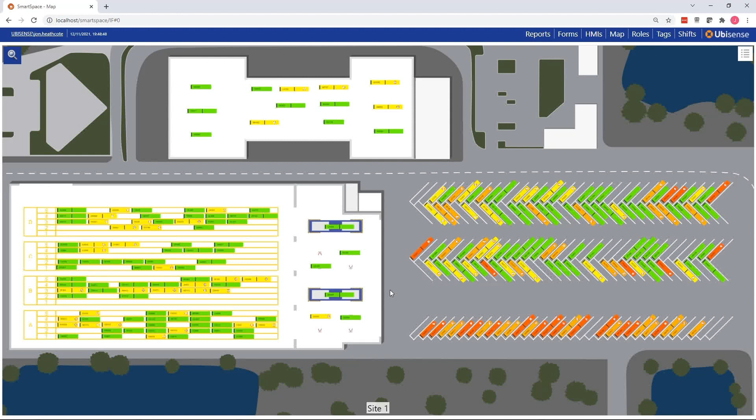Like with many other SmartSpace applications, we can deliver that information to end users in custom web user interfaces that not only tell you where your assets are located, but also a lot of valuable status information. Here we have a live web map view of our depot, and our buses are color-coded to indicate their current status—in this case, the color indicates the current maintenance level of the bus and its readiness to be allocated to the next round of pullouts.

If I click on any particular bus, I can see a bunch of information pulled from our depot management system, now easily visualized against the bus in SmartSpace, about its status. I can see buses requiring maintenance, what's wrong with them right now, and click into those buses to get more useful information.

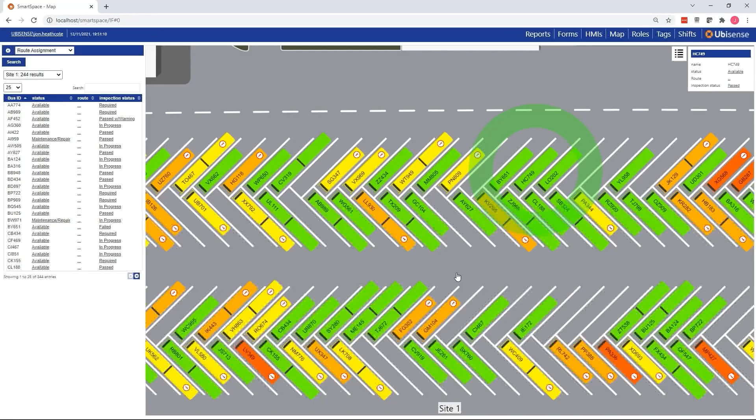What's great about this as well is I can use this web interface for managing data on our buses. So let's say I wanted to allocate one of these buses to a particular route. I can zoom in, find one of my green buses, find one that's available, and as soon as I allocate that to a particular route, the status of that bus will automatically update. SmartSpace automatically changes that bus's appearance so that everybody knows it's been allocated to a route, and I can see what route it's due to go on and when it's due for pullout.

The SmartSpace web map gives us many different ways of visualizing our asset information, in this case the status information of our buses. We can also see down the bottom here a large collection of buses awaiting maintenance. So as can be seen, SmartSpace, combined with these seamless indoor-outdoor tracking capabilities, gives depot managers the ability to visualize in a highly reliable way exactly where all their buses are and gain a bird's eye view of the status of all buses across the yard at any time.

Thanks, and back over to you, Andy.

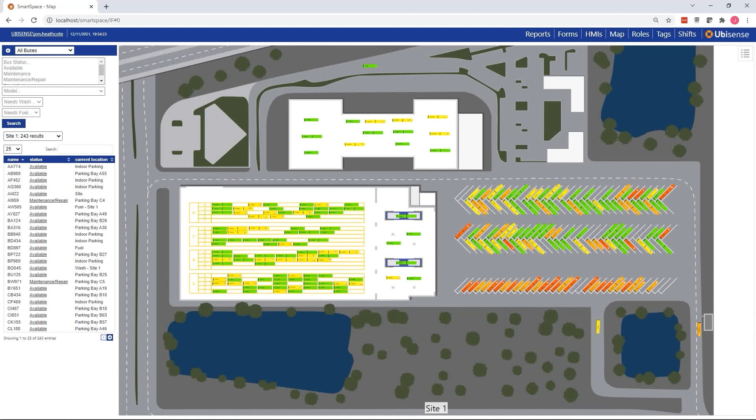Thanks, Jon. Steve, did we have any questions during? Thanks, Andy. Yeah, we do. We've got quite a few, but I'll ask you a quick one. Someone's asking about the Omni sensor, about its range, as in what sort of ceiling height is appropriate for that product.

So the range is in the sort of 30 to 40 meter distance. The ceiling height we've used it on typically so far has been up to about 5 meters, but I think it could go quite a bit further than that. But obviously, at some level, you start using up the range getting from the sensor in the ceiling down to the floor rather than out and covering an area. So that's something we'd look at with a customer regarding their particular site.

Fantastic. Thanks, Andy. It sounds like that's a challenge for the person who asked the question. We'll find out precisely just how high that ceiling is that we can mount it on. Thanks so much for your questions. A reminder just to submit them into the panel when you get the chance.

Okay, let's now go to our final speaker of the day, Lauren from Collins Aerospace. Lauren has kindly offered to talk about their project, and it's interesting because unlike some of the other speakers we've had today, Collins is really at the start of their journey with Ubisense, using a combination of our SmartSpace software and RFID tracking. I'm looking forward to hearing about the project they're embarking on at both their sites in Germany and the US, and what kind of advice they would give to other organizations starting out on their own real-time location project.

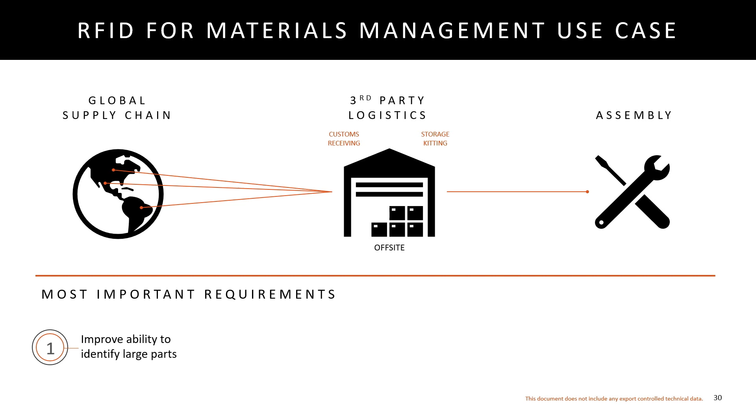When we started the project, we thought about our most important requirements for RFID technology. One main one was to improve our ability to identify large parts. Those big nacelle components arrive in large boxes that we stack two on top of one another, basically the size of a two-story building. If you want to know what's inside the top component, the serial number and all the information, you're largely dependent on paper signage and how it was positioned against the wall, if you can even see it. We wanted the ability to scan that box and know exactly which serial number and component it is.

The other thing we wanted was to automate some of the SAP inventory movements. Today our process is largely manual. We have wireless devices, but users and material handlers don't like the interface; it's not user-friendly, so they prefer to go to their desk to transact the SAP movement on a computer. We really wanted a user-friendly or automated interface to align the physical movement with the SAP movement, so we get more accurate data, besides the fact that automating inventory movement eliminates an entire section of waste in the business.

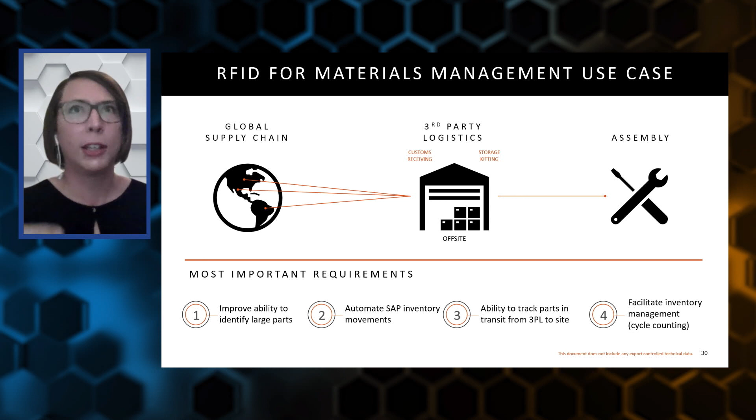So really quickly, I'll just walk through where we are. We're still in the process of development, so I don't have anything to show you that's been deployed yet. We're still installing the hardware and things like that.

The general flow of material will be through the 3PL warehouse, where it goes to a receiving area. We're installing an RFID table reader so the user can unpack the goods and perform the goods receipt in SAP automatically with RFID label printing. When they attach that label, they can store it into the supermarket. We had Ubisense design a better HMI, a handheld interface that's more user-friendly, where the operator takes it into the supermarket, and it organizes their route to make a more optimal way of taking parts from receiving and storing them into the supermarket, while also pushing the transaction to SAP so the part is now on the shelf.

We've also designed another HMI which helps with the kitting process. The user will go into the supermarket aisle with their handheld and be able to know where to select the parts they need to kit the different shadow boards. And as they're picking up the parts and putting them into the shadow board, they're able to issue those parts directly to the production order.

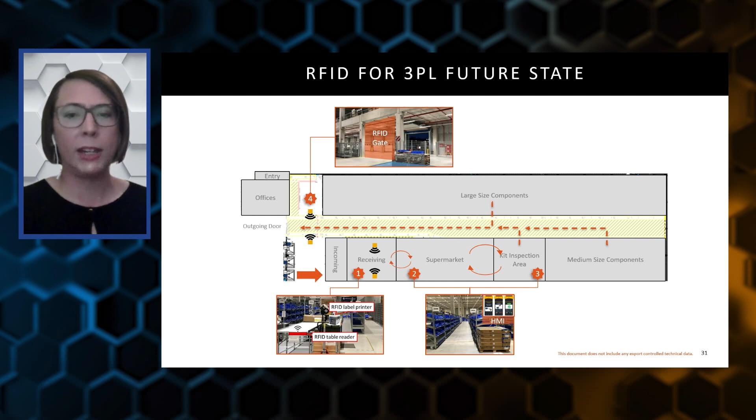From the SmartSpace HMI, they can also store that production order when the kit is complete, and it automatically performs the SAP stocking movement. So finally, when everything's been kitted and ready to be delivered to our site, the users can take the parts from the various areas and go through an RFID gate at the outgoing door, and that will trigger an alert that these parts are now in transit and on their way to our facility.

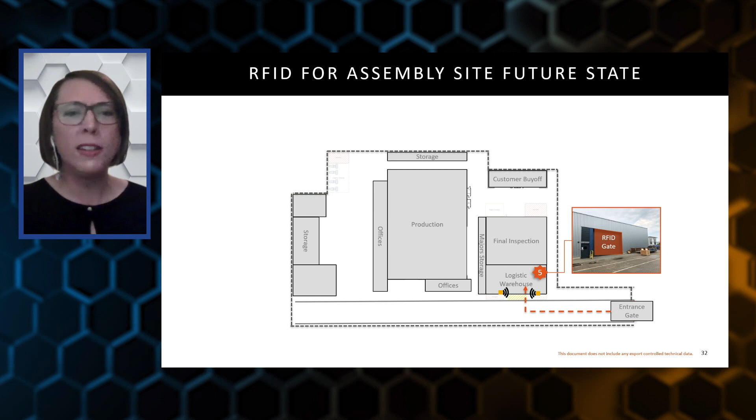Once they come to our facility, they go temporarily to our logistics warehouse where we have a Kanban in place. We are installing an RFID gate there to basically end the in-transit status of the parts. Now they're received at our facility. We no longer have to have forklift operators and material handlers going to their desk to make the inventory movement in SAP. It'll be done automatically once it goes through the gates.

And then finally, when the parts are ready to be delivered to production, they'll go straight to the production floor and go through another set of gates, where they will then be taken out of inventory in SAP and issued to this next assembly WIP. So we installed a lot of gates here to help with that automated movement of material while still using SAP as our system of record.

And I wanted to give some key lessons learned from our development process, because we did learn a lot. We developed this solution from nothing into what you just saw today. And I think the biggest takeaway is details. There were many cases where we didn't think something was super relevant, or we didn't go far enough into the details on something, and then it came back at us later, where we had to go back and rethink.

So some of the ways we could have avoided missing those details was first to empower the people. We had a huge team from people in the US to France and Germany helping on this project. But at the end of the day, the project is intended to help the material handlers, and it's supposed to make their lives easier. Including them in the project really made a difference, because they're the ones actually doing the work and they know what's going to be helpful. So encouraging them to speak up and participate in the development meetings was a big benefit, and we had a lot of aha moments whenever we included them.

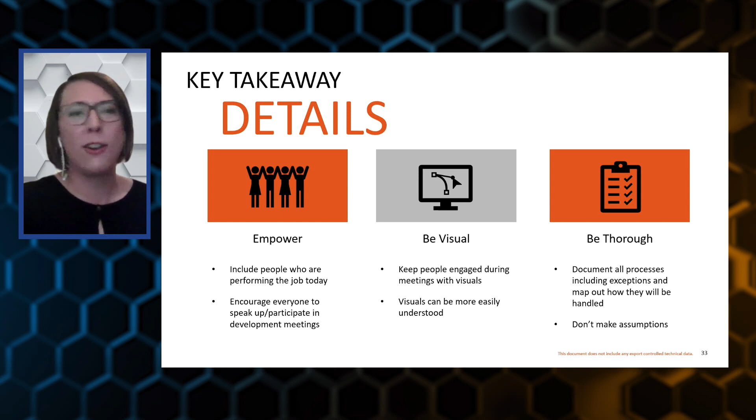A lot of people had never even visited the Hamburg facility. Maybe they never even knew what a nacelle was, because we were working with people from the IT department too. So just not making any assumptions about what people know about the process or the product really helps, to be sure that we get the details through to everybody and everybody understands what we're doing. So with that, I wish anyone success on their journey as they develop a solution for RFID or with Ubisense.

Great, thanks very much, Lauren. You talked at the start about this being a fun project. I suspect it's also pretty frantic as well. So thanks for taking the time to share with us today.

I just want to pick up on a thought you left us with at the end there. You talked about being inclusive, getting people involved, and being able to generate those aha moments when people speak up and contribute something as part of the team. Do you have any examples of the type of thing that came out of those sessions?

Yeah, definitely. We conducted one site survey late at night that didn't really involve the logistics team too much, and it led us to originally assume we needed an RFID table reader in the kitting area, because we thought all the pickers were going through the supermarket, picking the parts, and then bringing them to the area to put them in the shadow board. So we had gone forward assuming we needed this kitting table. But then during our second site survey, where we included a lot more of the logistics team members, we realized they are actually doing the kitting in the shadow boards directly in the supermarket, and we don't need this kitting table at all. In fact, they wouldn't use it if we installed it. So it was really good to have known that and corrected it before we went ahead with the design. Now we've developed an HMI in the handheld units that can help with the pickers.